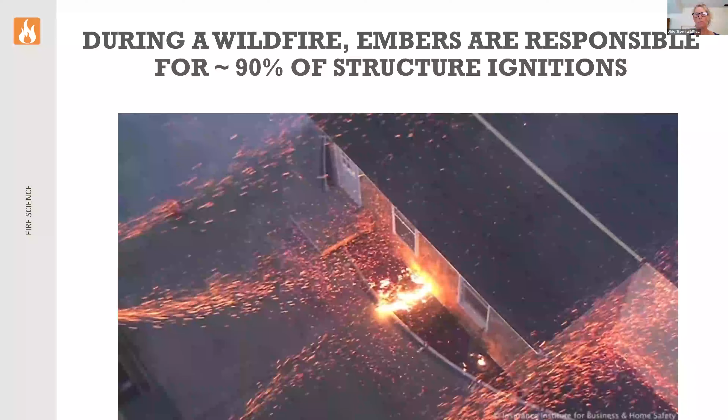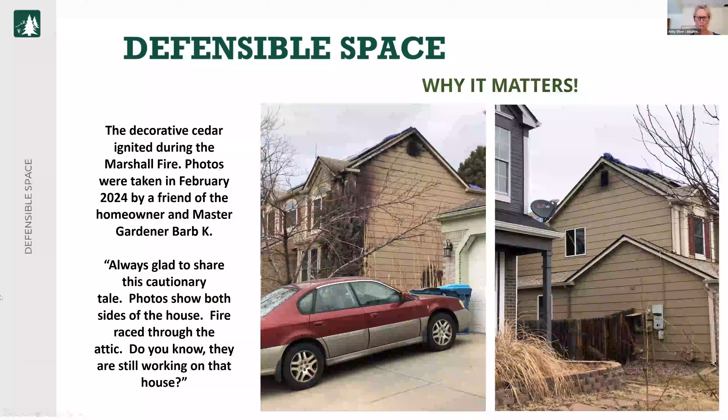This really underscores the importance of fire resilient landscaping best practices. At the general concept level, the first 5 feet or so from your home out should be completely non-combustible. Then as you get further away from the house, your plants go from lower growing and more dispersed to where they can get taller and perhaps clustered a little closer together. In more of our urban, suburban development, we aren't going to get to that point like 30 to 100 feet away from the house like you do in the forest, where the trees can really start to be dense, because you're going to start impacting your neighbor's home.

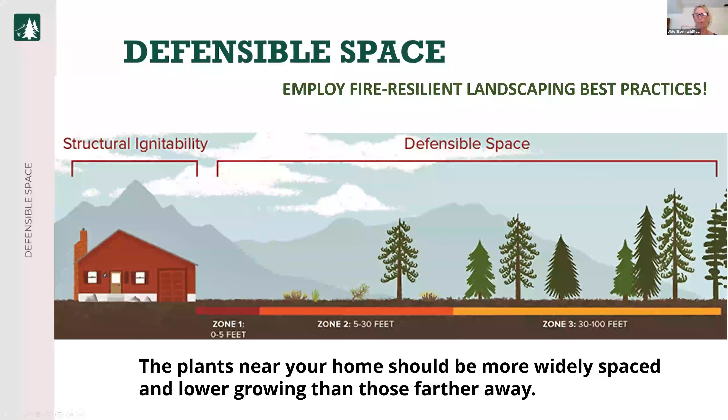But this is just the general concept level practice. I'm going to go through a few quick visual examples of what fire resilient landscaping looks like. You want to have an intermix of hardscape elements like boulders, rocks, gravel, and concrete pathways and driveways with your plants.

Michaela will go into the details of the beauty and colorfulness, which I personally highly encourage. But if you have some potentially taller growing things like shrubs or taller plants, you want to make sure they're surrounded by lower growing plants and hardscape. Again, plant in small irregular clusters or islands so that if embers are blowing in and something does ignite, your landscaping doesn't create a fuse that will lead that fire towards your home.

Re-envision mulching. I think a lot of us think of mulch as shredded wood or that type of material, and we think of piling it up in the plants that we traditionally have always placed right next to our home.

The fire resilient way is to use pea gravel or squeegee, which is a type of pea gravel specially designed to have more water retention properties. Or you can just leave bare ground in between plants.

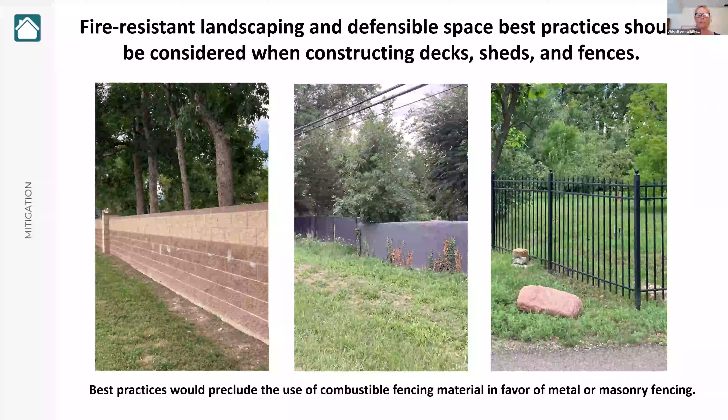And one other spot to pay close attention to right near your home is the window wells. This should be an area that is protected, that's kept clean at all times, and ideally is constructed of a non-combustible material.

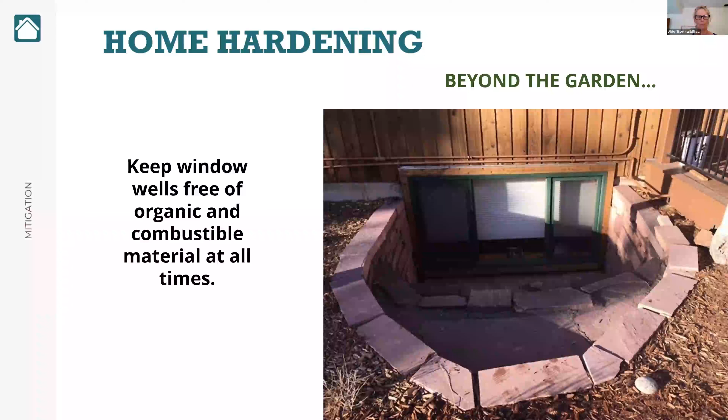On the fence side, if you don't have the money to retrofit the entire length of your fence, you for certain want to make sure that the last bit, 8, 10 feet, 5 at the minimum, that abuts your home is a non-combustible material. You can also break up the fence in other places, like putting a metal gate in the middle of the fence, or a non-combustible section somewhere. Think about how to strategically interrupt fire from being drawn straight to your home.

If you're in the process of rebuilding or you're considering what to do about a deck that you already have, definitely a patio would be a much better alternative from a fire resiliency standpoint.

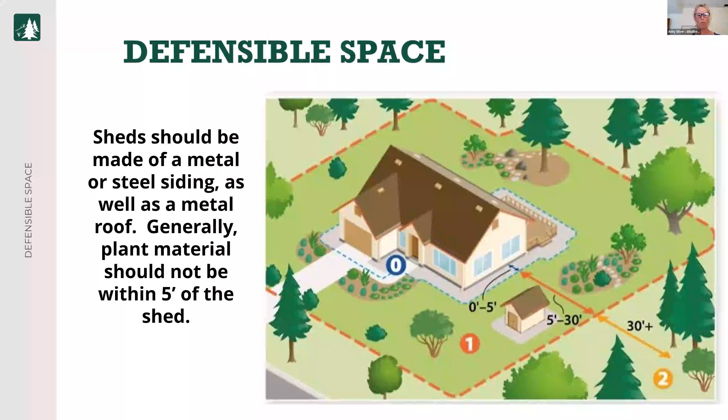So those are, this is just an overview. And again, we're going to have time for question and answer at the end. But with that, I am turning this over to Michaela to talk to us about the templates.

Wonderful, thank you Abby. So tons of good information just in general about making sure your property is fire resilient.

The sustainable landscape templates from Northern Water can be found on their website. And there are, as Abby mentioned, some designs based on the most common lot sizes of the houses that were affected by the fire.

I think the point here that we really would like to bring home for folks is that these really are just that, they're templates. So just depending on your lot, which way you face, your sun exposure, things like that, these aren't one size fits all, but they can easily be adapted.

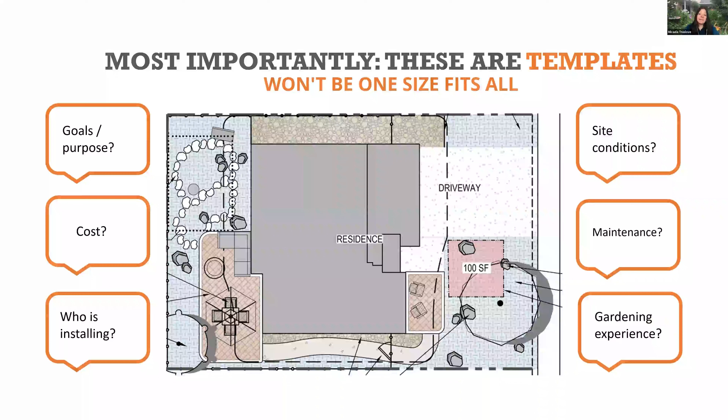So each template kind of has this general design. It's just going to tell you where hardscape features go, where they have low water use beds, things like that. But they won't have a specific plant list on this particular view.

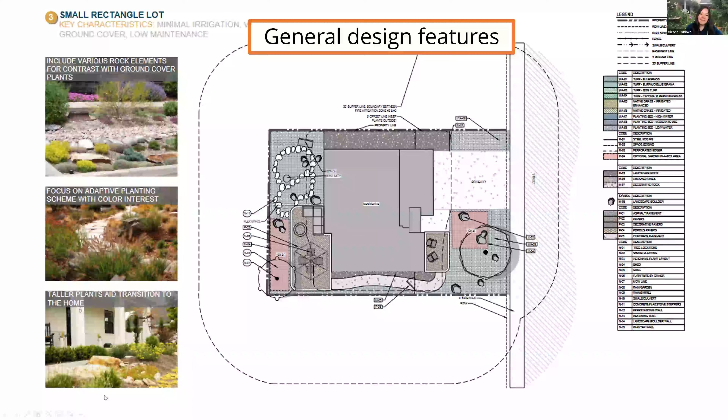And then each design does come with this other view that does have a plant list. And I apologize, these things are tiny. So when you go to the website and click on these designs, you can obviously zoom in so you can actually see what those plants are.

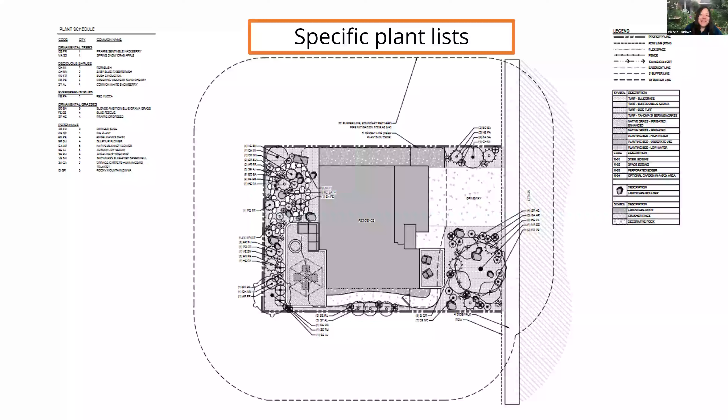So this is just a little bit closer up. And here's where I want to talk about how you might start adapting these based on your goals. Obviously everyone's house is going to be pointed in a different direction, you might have different site conditions, and for some reason your soil may be a little bit different. Construction soils are...

notoriously different or difficult. So just depending on what the lot was backfilled with, or if they scraped off all the soil, which is definitely something that is commonly done, your soil conditions may be not as homogeneous as we would like. So everything's just going to kind of depend.

So we really want to just start asking questions about, most importantly, what are your goals? What is the purpose of this space going to be? Just as an example, the plants that are listed here are all full sun plants. So if your backyard is facing north, they probably aren't going to be super happy there. And then the cost of plant materials, the availability - some of these plants may or may not be available. And then what the purpose is - do you want to attract pollinators, things like that?

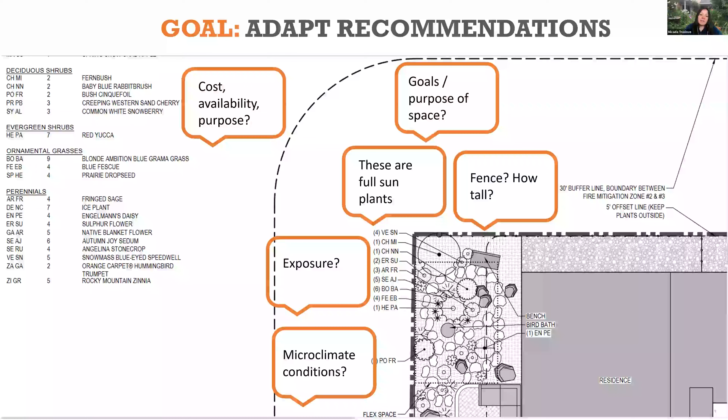So our first step is just to do what we call a site analysis or a site inventory. That is really just looking at your lot and noting every feature that could affect the landscape. So obviously you want to know which way your house is pointing, where you're getting sun throughout the day, whether you're facing west or north or whatever, since that sunlight is going to change throughout the day.

You're going to want to pay attention to water movement. So maybe as spring's setting in and we get a couple more rain and snow events, you're just going to start paying attention to how the water moves through your landscape, where it pools, things like that. You might have areas that have really bad drainage.

And then you're going to pay attention to things like views. So if you're staring right at your neighbor, maybe you want to make note of that so you can construct some sort of screen. You want to note where your downspouts are, the wind direction - we know it comes pretty much from the west - and any utilities, you want to definitely make sure you know where those are so you don't dig through them.

And I say this from experience. And then any areas where you might have a microclimate - this might be a low spot in your yard where cold air collects, or you have a sloped area, so anything like that. The best way to do this is just to observe and take notes.

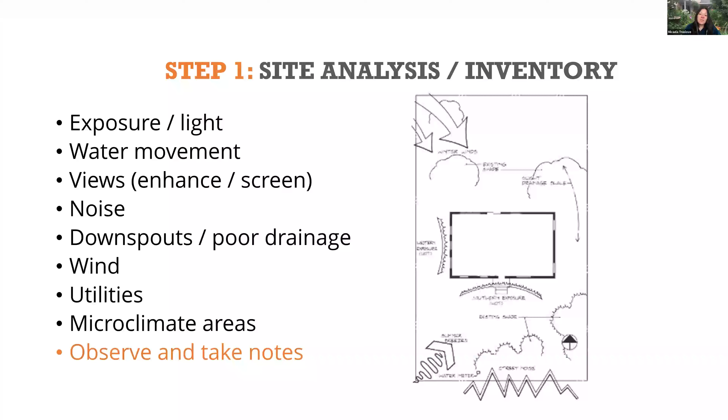So just kind of thinking back to that previous slide, if we have a hypothetical example here with a north arrow drawn in - that's the first thing you want to do. We might have that north side of the house, like I mentioned, might just be shady all day. Note where your drying west winds are coming in.

Note where your views are - maybe you want to put something really decorative outside the kitchen window, so when you're standing there doing dishes, you're looking at your beautiful garden. Again, noting those microclimates, note where your very hot, dry exposures are - the southwest side of the house is usually that - and again, just all of your downspouts, sloped areas, things like that.

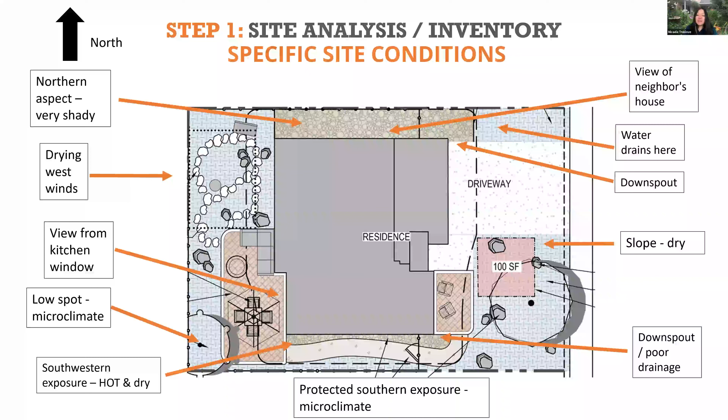And then obviously you just want to do what makes sense for you, right? So again, kind of thinking about that back northwest corner, maybe you want to put a shrub there just so you can screen a view. You want to add some screens just to block some of those really punishing winds when we have them. Looking out your kitchen window, maybe you want a pollinator garden.

Also noting the elements that Abby was discussing - so in zone 1, you don't want to plant anything underneath your trees. You want to maybe have some of those decorative flower pots that are easily moved if we're having red flag conditions, things like that.

So this is probably, if we're talking about gardening, the number one principle to remember: right plant, right place. This is just choosing plant material that matches your landscape conditions rather than the other way around. We want to think about things like the purpose of your landscape, your goals as a gardener or a homeowner, and again, just those really common elements.

And so the plant tags that come with your plants are your best friend - they're going to tell you what your mature height and width are. You see folks who think that a cute little fuzzy blue spruce is kind of like a puppy, right? And so they just want that super duper close to their house until it grows into a 70-foot tree and it eats your driveway. I see that all the time.